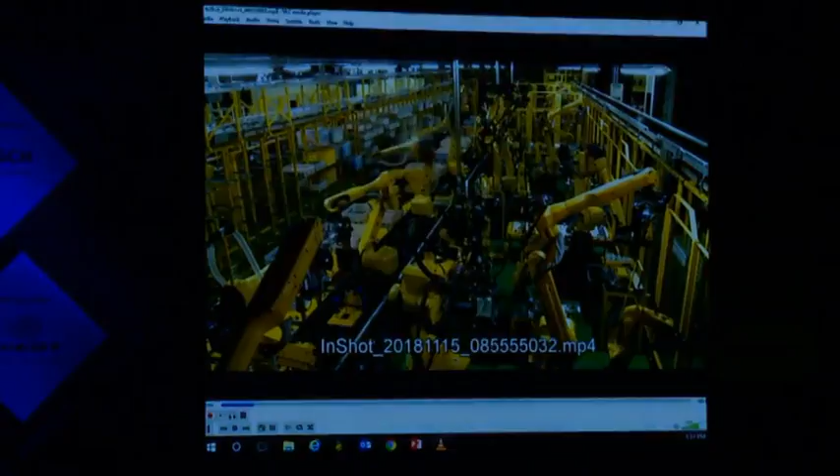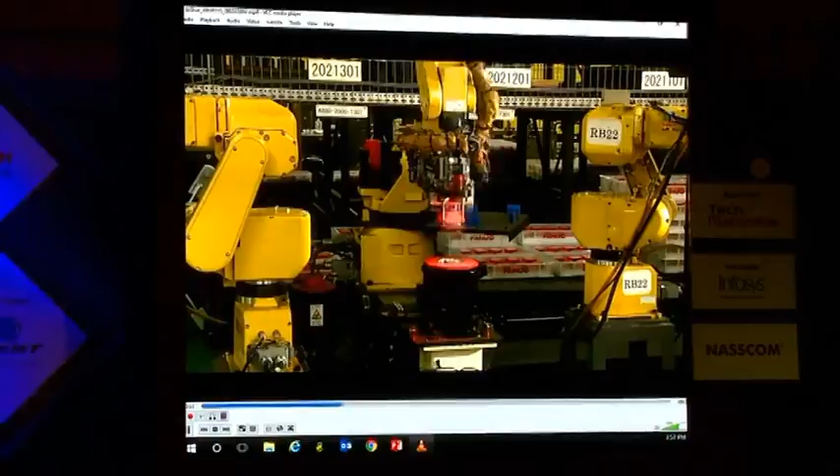The automated lines use a great number of... this is our motor factory. It is the largest motor factory in the world. There are about 4,000 robots working at our shop floor at the foot of Mount Fuji in Japan. And here you can see it adding the cap to the motor, getting fastened by our small robots, etc.

Fanuc has about 150 employees on the shop floors, but we have about 4,000 robots working there. And we manufacture only in Japan, the second most expensive country in the world.

But we have been doing connected factories long before IoT was even a word, let alone a buzzword. In the 1980s, Fanuc came up with our first unmanned operation, a 24-hour unmanned operation factory. Then by the 90s, we went up to 72 hours unmanned operation, which is basically a weekend. And finally, by 2006, we launched our 720-hour unmanned operation, which is a month.

So this is the background—Fanuc had been doing it in-house in order to make the best products to serve the world, because we serve the manufacturers of the world.

In 2016, we started with MT Link I. We launched Machine Tool Link I. We serve the machine tool industry, which is the crux of any manufacturing industry. You may wish to know that Peenya in Bangalore is the headquarters of companies that manufacture up to 70% of India's machine tools. Any successful manufacturing country has a very strong machine tool industry.

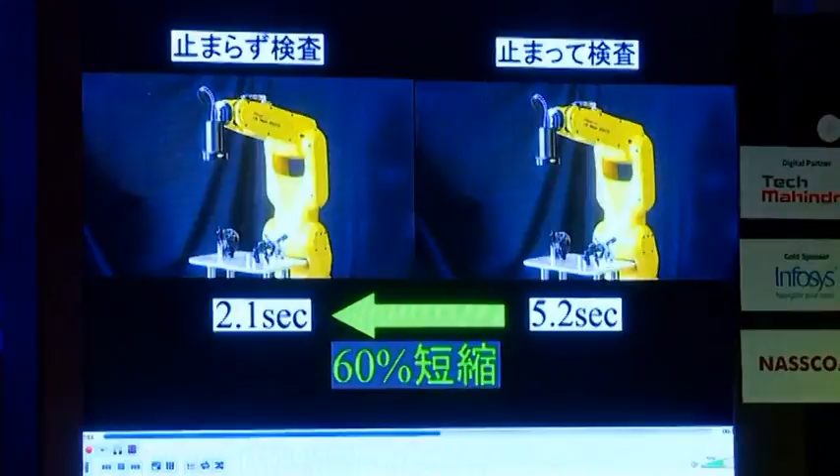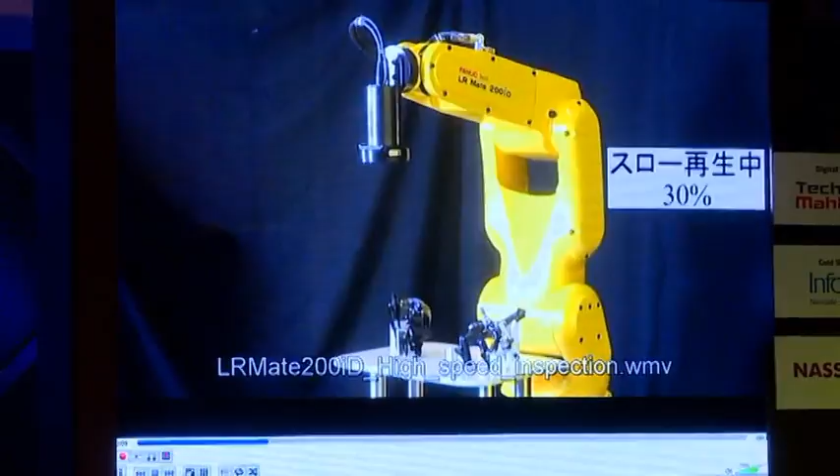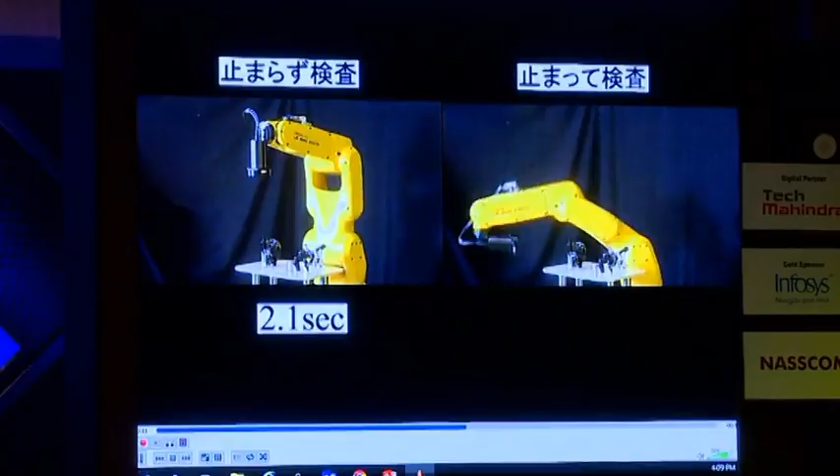robotically inspect a part with 9 components for presence and placement. The LR Mate, let me tell you, is our fastest robot. It's the fastest in the world, moves at 4 meters a second. Before invoking machine learning and artificial intelligence, we used to be able to achieve this at 5.2 seconds. These are the 9 components you can see, like the cap, the O-ring, the bolt, the QR code, and so on. But this checking is enhanced with ML and AI to 2.1 seconds, which is a saving of 60% cycle time. And this is actually happening in our shop floors in Japan.

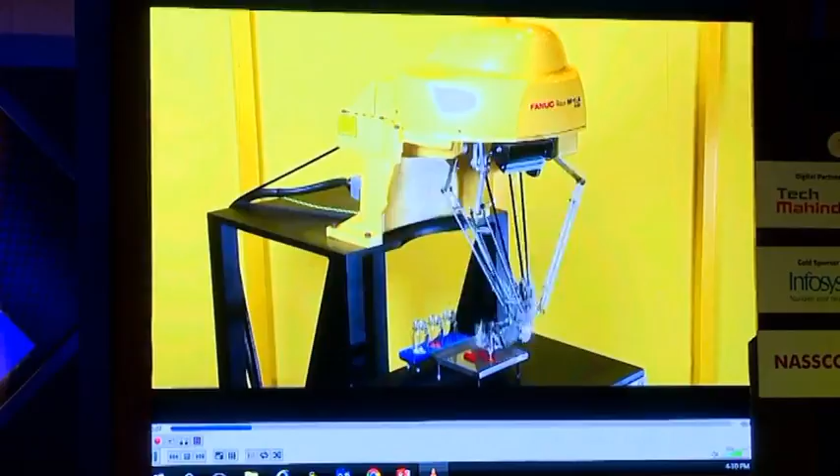There is another video I can share wherein we have a small robot which sorts colored pills using ML and AI. It is our fastest robot in terms of 120 picks per minute, and it not only picks but also counts them, and it realizes when a pill is missed.

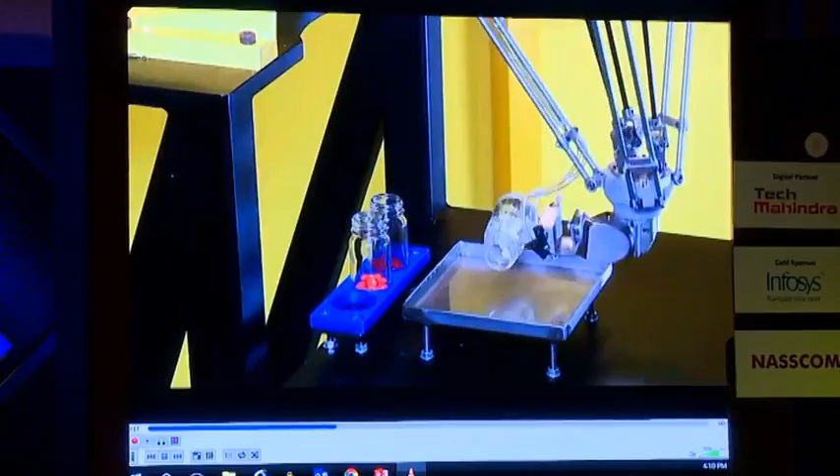So this is one of the displays. By the way, on a lighter note, I would like to share that Prime Minister Modi and Shinzo Abe, the Prime Minister of Japan, were at Fanuc last week, and they were very intrigued by this.

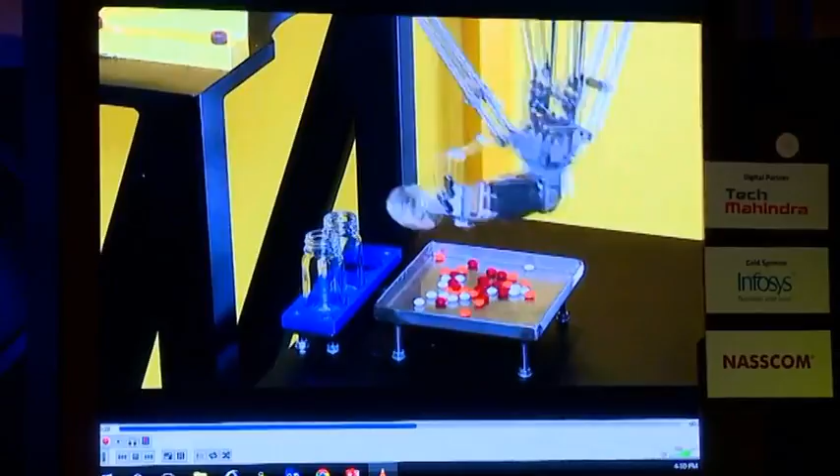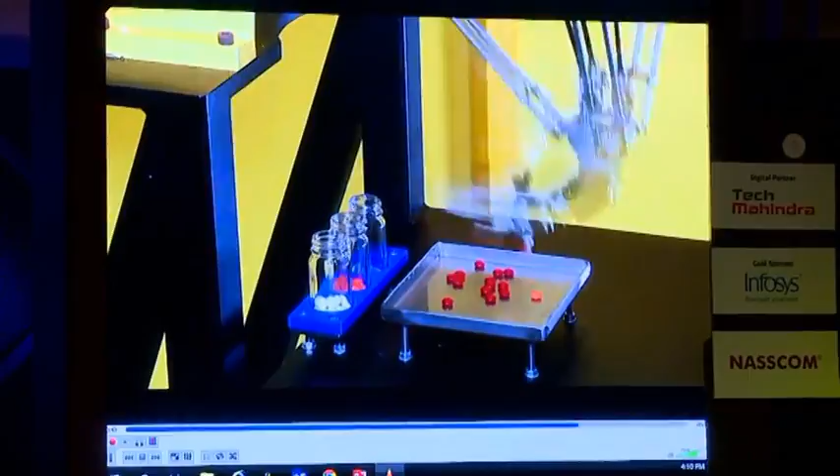As you can see, the robot is sort of mixing them all up here, and then using its learning, it will take a picture and at high speed pick the right colored pills into the right jar, and also the orange ones. Then while picking up the red ones, there's a little mistake and one of the pills skids off to the side, but because it's counting, the robot knows to take another picture and do this.

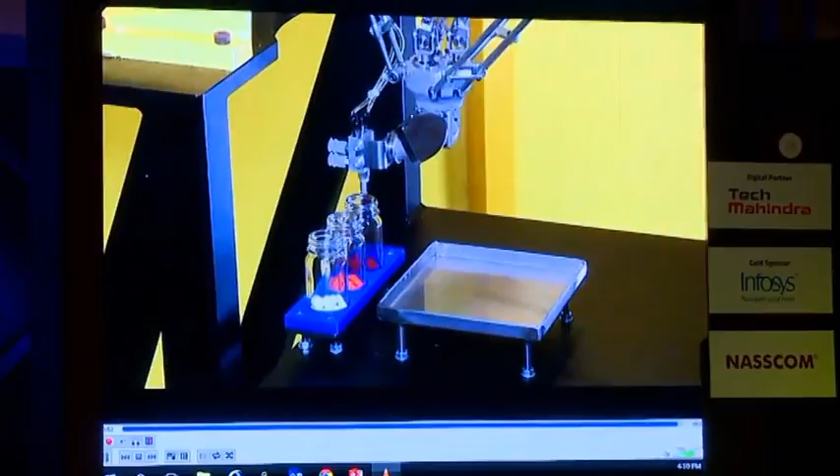And a final one, since all of us are so in love with smartphones, I can't take credit, but thank you. The final video, very quickly, since people are so interested in smartphones, you may find it hard to relate to Fanuc, but here we are taking a smartphone frame, completely manufactured and ready for shipping.

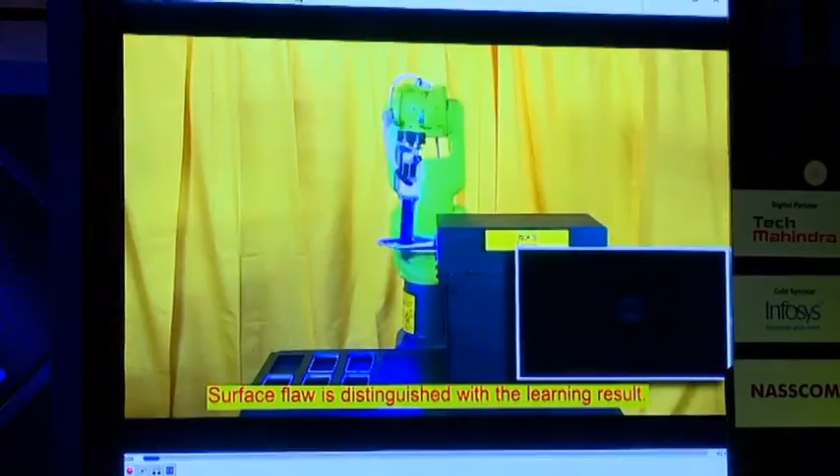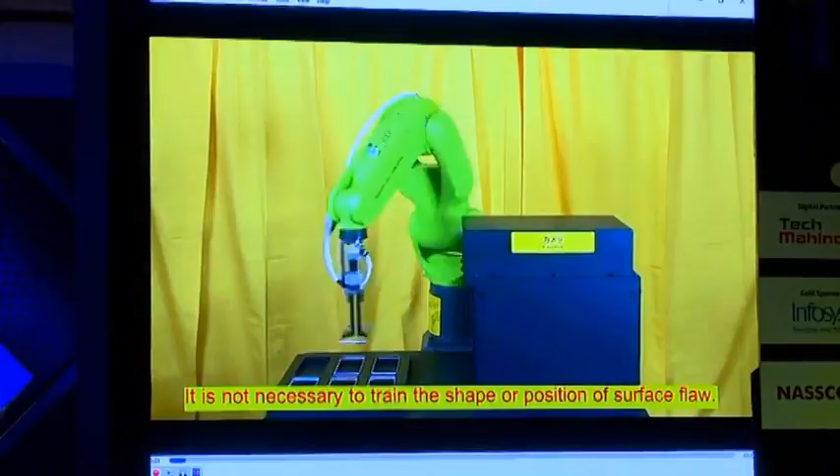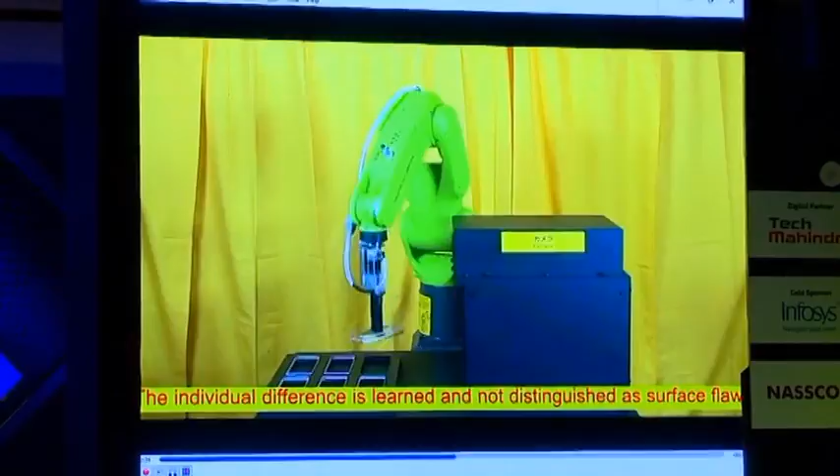It is being inspected for surface finish by what we call a collaborative robot. It is not our standard yellow robot, but a highly sensitive robot designed to work shoulder to shoulder with a human operator. It is also invoking machine learning to detect flaws and accept or reject these frames, but it also has iterative learning, so its inspection becomes all the more refined. Whereas a human operator can easily do this for 5, 10, 15, 20 frames, doing this for 8 hours at the same degree of accuracy is impossible.

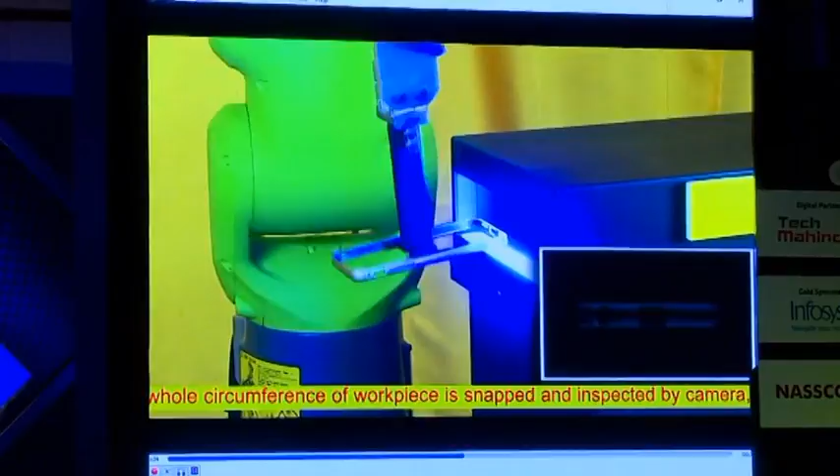And so that's what this robot is doing. The reason this is slow, by the way, this is the same LR-Mate robot that you saw, but it is deliberately slowed down because it is of the collaborative robot class, for safety. In closing, I would like to say that this is where we are with IoT, or IIoT would be more accurate. Everything you see around you, your cell phone, the entire body, the lens, the light guide panel over which you can so beautifully scroll and look at pictures of your dogs or your wives or whatever, is made by equipment which is made by Fanuc. Fanuc is a very low-profile company, but it has been using this power in-house and is now presenting it to our customers starting April 2020. Thank you, ladies and gentlemen.